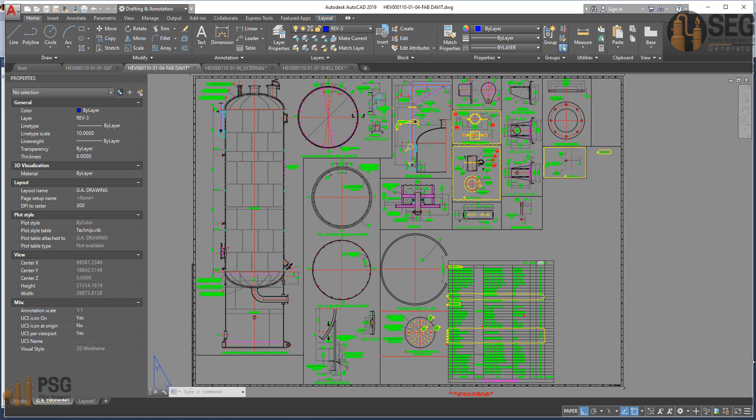In this part of the tutorial, we will discuss how to generate the top davit for this vessel, and here we have the detailed drawing for the top davit. Now let's select CAN 1, and from the elements and from the external attachment, you will find here an item called top davit. So now let's add the top davit. Okay, and from here let's select it.

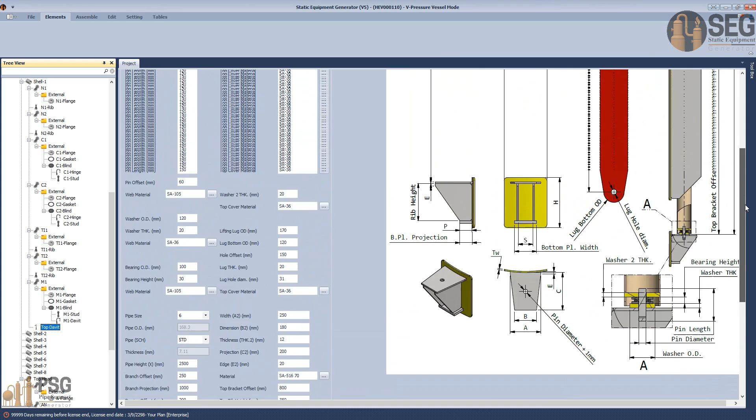As you can see, you will find on this list different types of top davits, so you can pick the suitable type for your case. Here we have two brackets, a bottom bracket which fixes the ball bearing, and another top bracket, and we have here a perpendicular pipe or bracing pipe and another bracing pipe, or a branch pipe and bracing pipe.

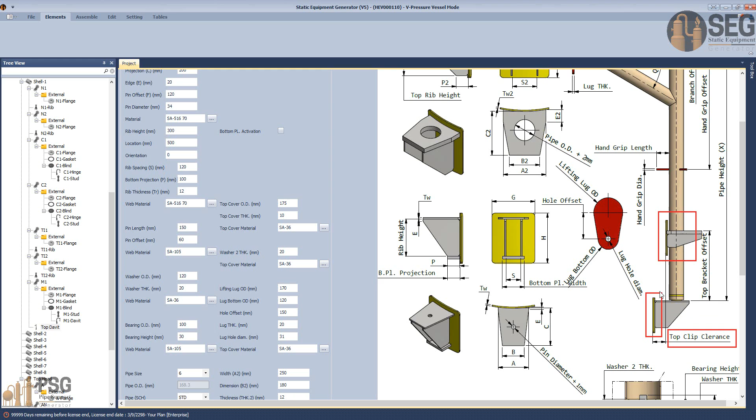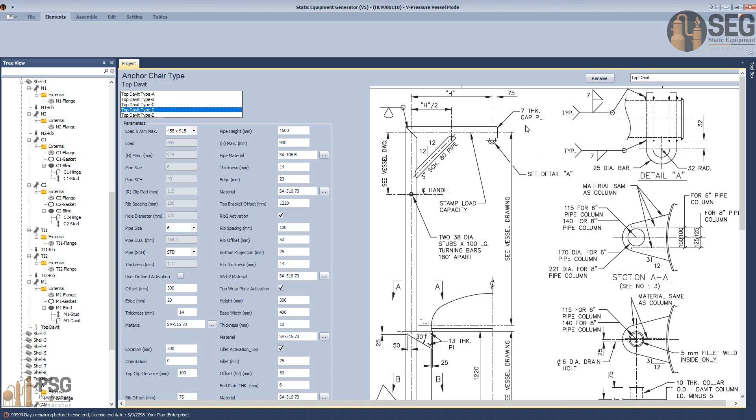The same configuration, but here, as you can see, with different diameters. The bottom clamp or the bottom bracket with a different diameter than the top bracket. Another type, which is type C, it's related to another standard spec, so you can use this type if it suits your requirements. Another type of the top davit, like that, and the lifting lug here is just a U-bolt, but in our case it's a blade like that, so that type will not suit our requirement.

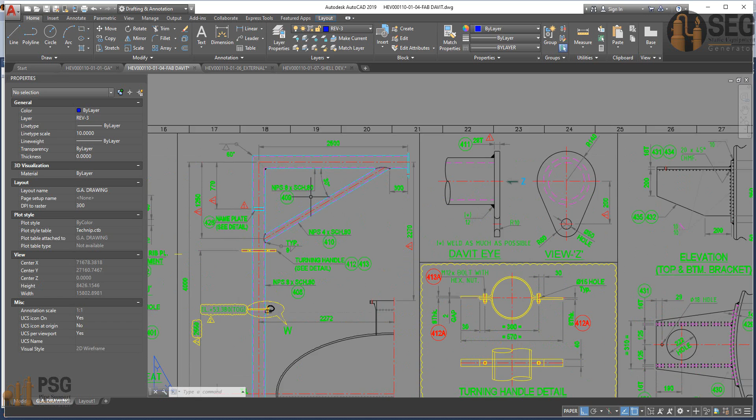And here another type. Now, the nearest configuration here is type A. Okay, but here we have a slight projection from the branch pipe, and the bracing pipe has the same diameter of the main pipe, but in our case it has a different diameter. But no problem, let's use this type and start defining the dimensions.

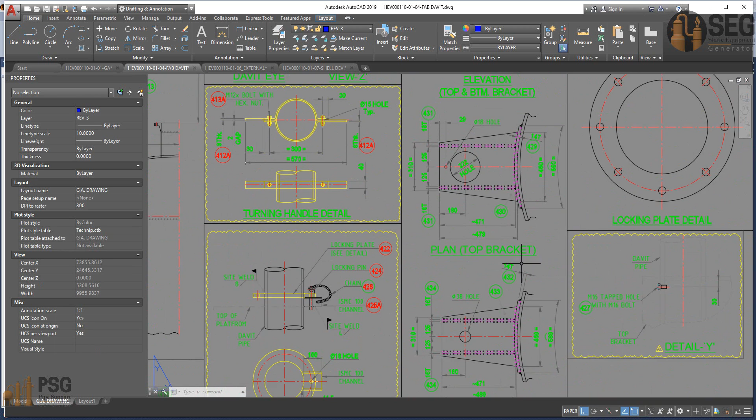If we take a look here to this image, for the bottom bracket you will find two dimensions to define this plate, A and B, and here the projection, which is C and E. So if we take a look to that view, we can extract those dimensions. So that's the minimum width, and here the maximum width. So let's fill the dimensions as per this drawing. So I will fill the dimensions to be like that.

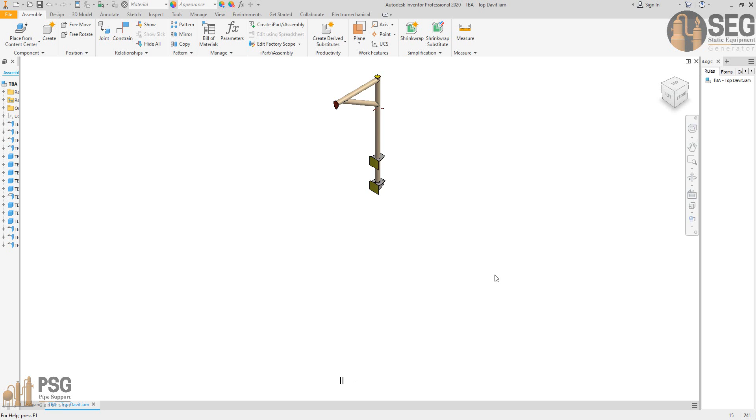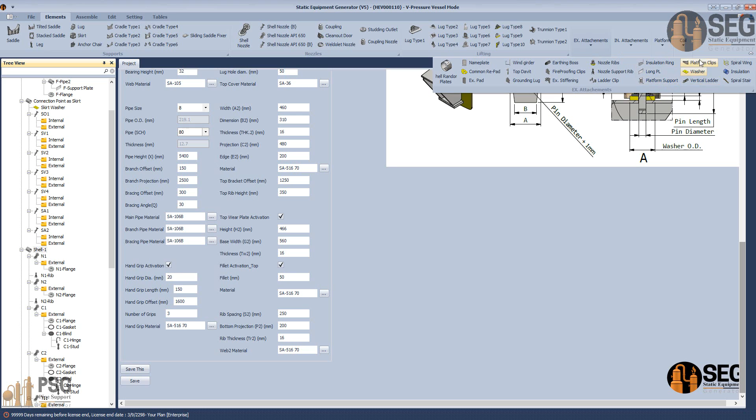And here finally we have the top davit on the vertical vessel. Okay, and now we could add some external attachments like external supports, platform supports. And now let's select, for example, CAN 1, and from external we can select external platform clips. So from here we can select platform clip. We can call it clip 1.

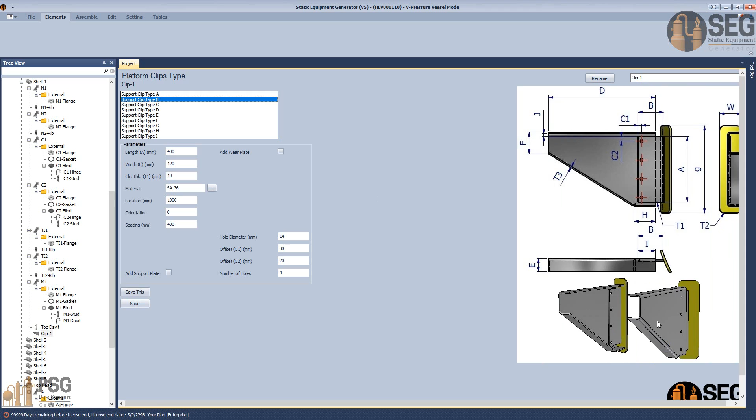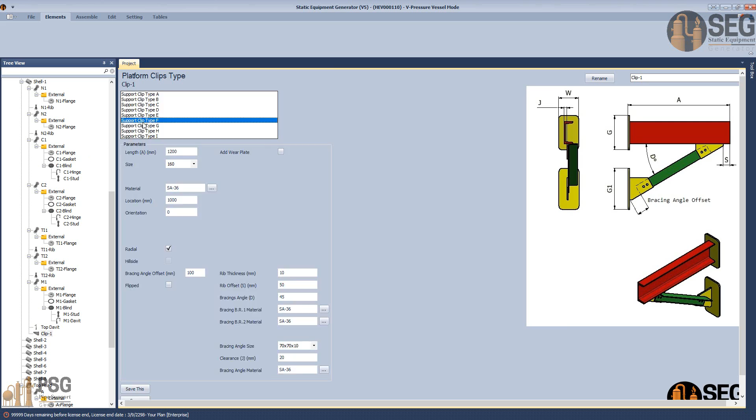And when you select this support clip, you will find different configurations for this support clip. One of them is support clip type A, and here support clip type B, you have double supports with spacing, and for the third type you have a cross section like a C created from formed plate, and here for type D a single one. Have a bracing like that, another stiffening clip like that. So you have many different configurations, so you can select the suitable type for your case and define it.

Here the width of the wear plate is 60 millimeters, and the length is 420, and the thickness, let's keep it 10 millimeters, and the fillet could be 15 millimeters, and the hole diameter and the hole offset from the other side, C1 and C2, and here's the number of holes and number of columns. If you have more than one column; that's one column.

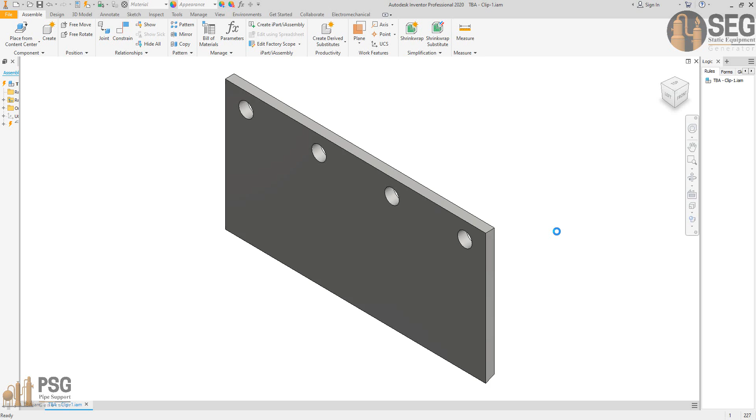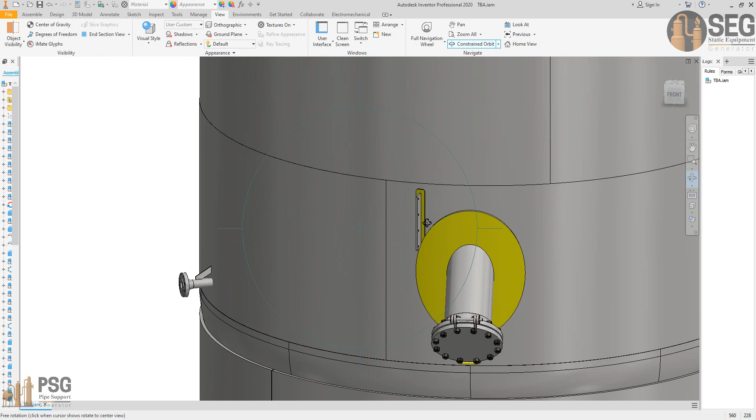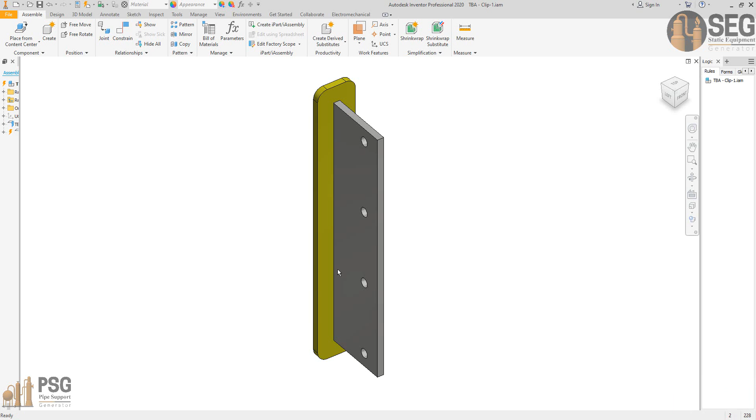So by that way, we have a support clip like that, so you can change the orientation of this one. So from here, let's modify the angle of this one. Let's make it 120, and click on Start Assembly to modify the orientation. That's the start angle, sorry, so we could change the start angle from here. So let's make it 30 degrees.

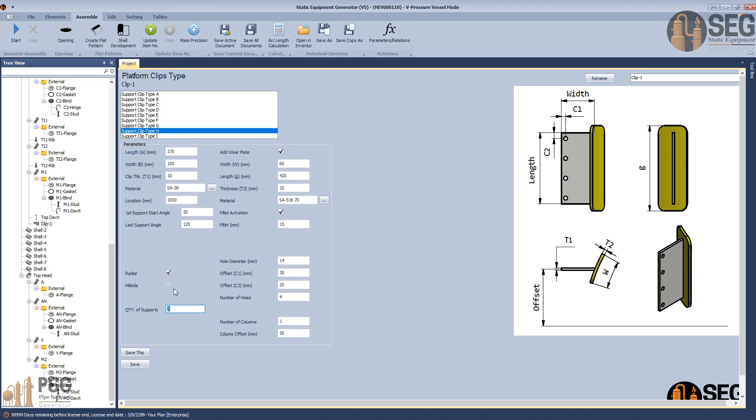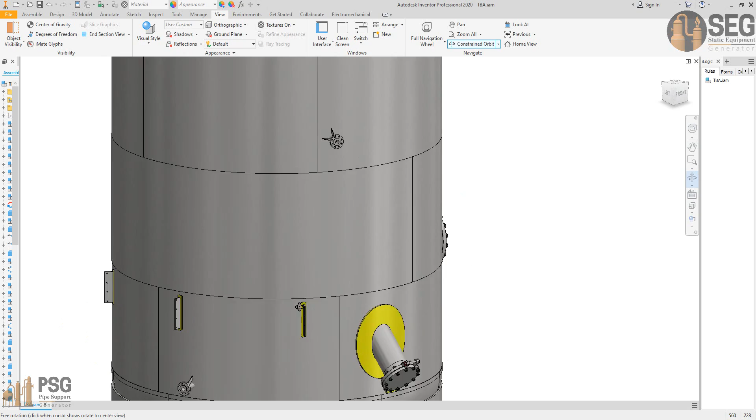And if you have more than one support, let's add 3 supports, for example. And here that's the first one and the last one orientation. So the first support will start at 30 degrees, and that's the last one. So the second one will exist between those angles. So let's start the assembly to update this support clip. So as you can see, now we have 3 support clips with equal spacing in the angular direction.

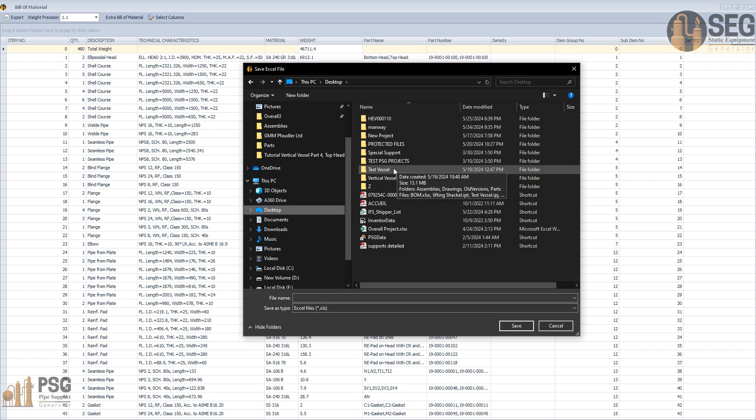Now, as you can see, in around 2 hours, we generated the complete 3D model for this equipment, and you can get a detailed bill of material for your equipment from here, from SEG bill of material. And here you have the total weight of the equipment. It's around 47 tons. And you have here a list of the items. You can export this bill of material as an XLSX file. So let's go to the project name, or we can add this file directly to the desktop.

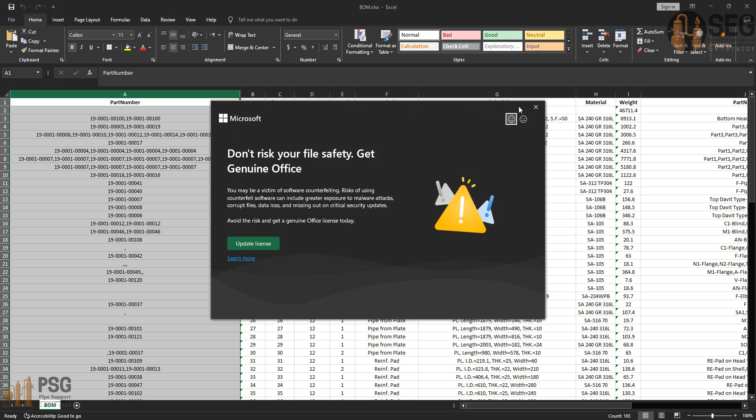And if we come here and open this file, here we have the bill of material. So let's select those columns and hide them. And here we have the bill of material of our project. Here the item number, here the quantity, and here the description of the item and the technical characteristics of each item, and the material of the item and the weight of each item.

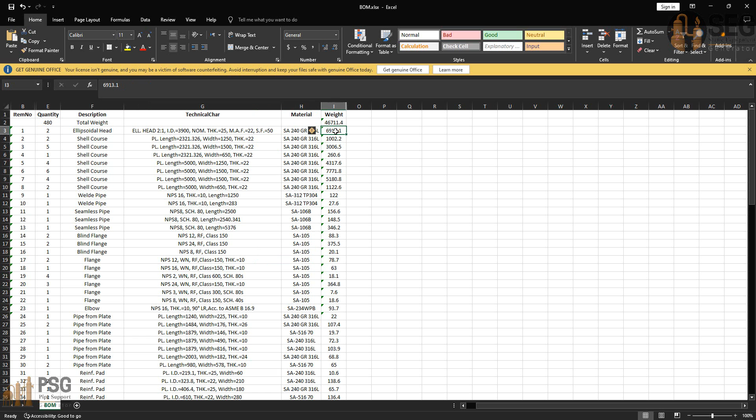I hope in this tutorial we covered the 3D modeling for this equipment, and inshallah in the next tutorials we will discuss another equipment.